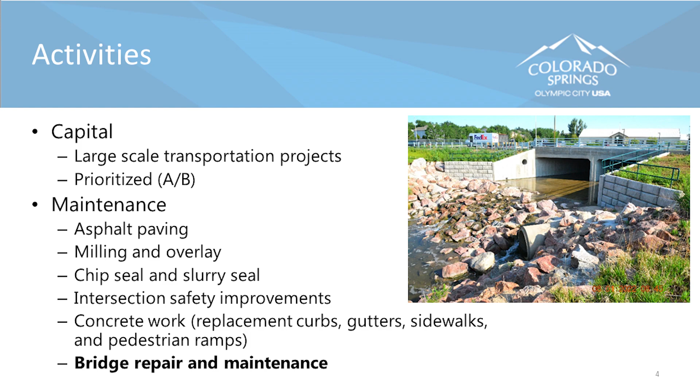So what goes into those components? I'm going to talk about capital at first, that 55%. We have both an A-list and a B-list prioritized list of projects, and those projects can be specific bridge replacement projects, and others can be larger transportation projects that include bridges. And then the maintenance or that 35% piece goes a lot to pavement preservation, intersection improvements, concrete work, walls we have within a right-of-way, and most importantly, bridge repair and maintenance.

Again, jumping into that 55% sales tax and how it applies to our bridges. First of all, that results in about $60 million for the city per year. Between 2015 and 2024, that resulted in about 17 replacements and 5 new bridges. And we're projected with our current extension between 2025 and 2034 to have 11 replacements and 10 new bridges. The other thing that's included in that capital component is what we refer to as an emergency bridge fund. And we're going to talk a little bit about that in just a moment.

That maintenance piece, or that 35%, between 2005 and 2021 has resulted in $511 million for the city. And again, as that gets applied to the pavement, concrete, or other structures in our bridges, we have a good application, and our bridge maintenance fund averages $8.5 million per year.

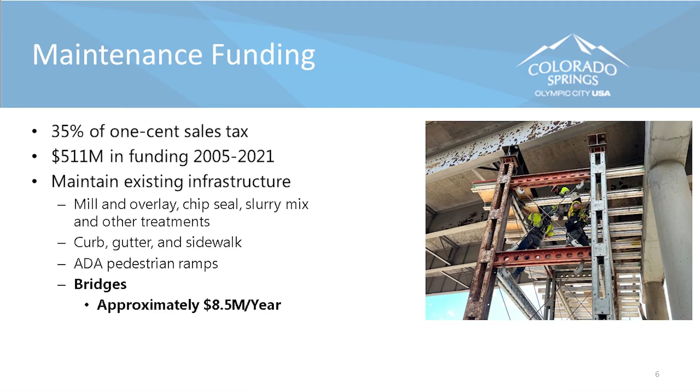All right, I'm now going to turn it over to Brian. He's going to talk more specifically about our bridge asset management program, and then we're going to come back and talk more specifically about the funding and how we leverage it. As mentioned earlier, I'm the bridge asset manager for the City of Colorado Springs. So I'll start with just a high-level overview of our bridge assets.

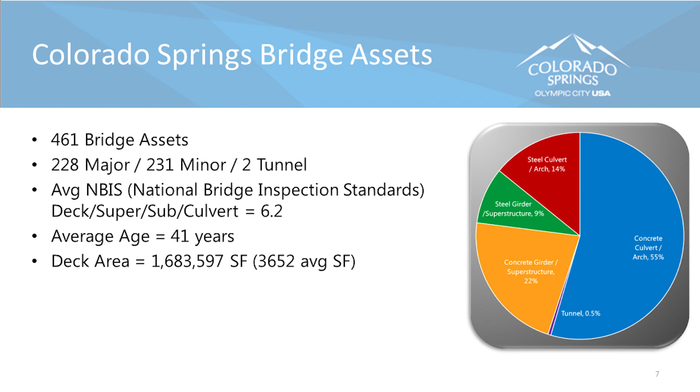We have 461 bridge assets split about evenly between major and minor structures, with 2 tunnels. Our average NBIS condition rating from the bridge inspection standards is just over a 6, and the average age of our infrastructure is approximately 41 years. I don't know if the graphic's legible or not, but about 70% of our inventory is culverts. The way the workflow functions for our bridge program is we receive the bridge NBIS inspection data from the off-system bridge inspection program.

In addition to the off-system program, we perform minor inspections on our structures that range between 4 and 20 feet in span. And we have an enhanced inspection program where we perform more frequent inspection intervals for our critically rated infrastructure, some of our infrastructure that's kind of in need of urgent maintenance and repair that we haven't been able to get to yet.

The program basically goes through the data that we receive, and we start identifying our capital funding needs. We break down our capital funding needs into 5-year bands, which feeds into the 10-year list of projects that Gayle mentioned earlier that ultimately go on the ballot for capital replacement.

Additionally, we perform hydraulic evaluations as part of this program to understand if we need to replace a structure, not necessarily due to its structural condition, but potentially due to its hydraulic adequacy. And we perform replacement analysis and studies of the bridges that we're planning to replace in the capital program, just to have a better, accurate estimate of what our funding needs will be.

Finally, we place a large emphasis on our preventative maintenance. A lot of our infrastructure doesn't have a waterproofing system in place, so we're going through and adding a lot of that with sealers and waterproof projects, and we're addressing a lot of our corrugated metal pipes with pipelining projects.

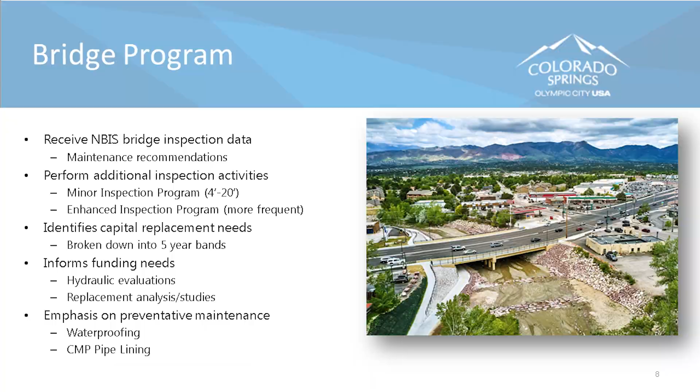Our main prioritization tool for the city is our City Health Index. It's modeled after the FHWA Health Index and is tailored towards the city's needs. It's comprised of 5 categories. We have a condition index, which is largely based on the NBIS condition ratings for deck, super, sub, and culvert. We have a function index, which is largely geometry based with vertical clearances and approach geometry.

We have a safety index, which is risk-based issues such as hydraulic capacity and traffic safety. We have a remaining life index, which is remaining life expectancy based on condition ratings and the controlling components, and an assessment ratio, which focuses on our pedestrian needs and missing sidewalks in the city.

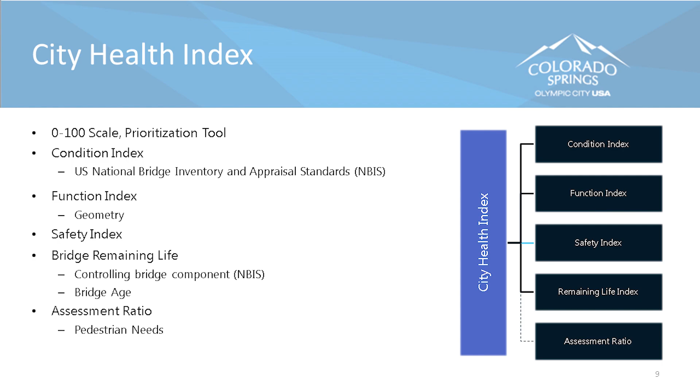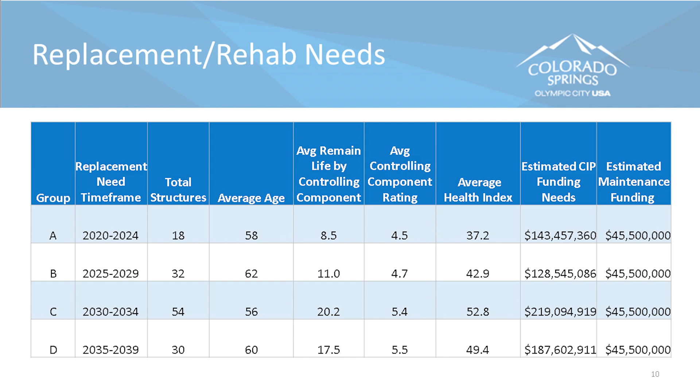The bridge program at the city has really come a long way in the last 20 years. About 20 years ago, before PPRTA was put in place, the maintenance funding for the city was approximately $250K a year. In 2004, 2005, when PPRTA was implemented, it jumped to $1.8 million per year, and it has steadily increased ever since. From 2015 to 2023, we've averaged about 4 rehabs or replacements on the capital side per year.

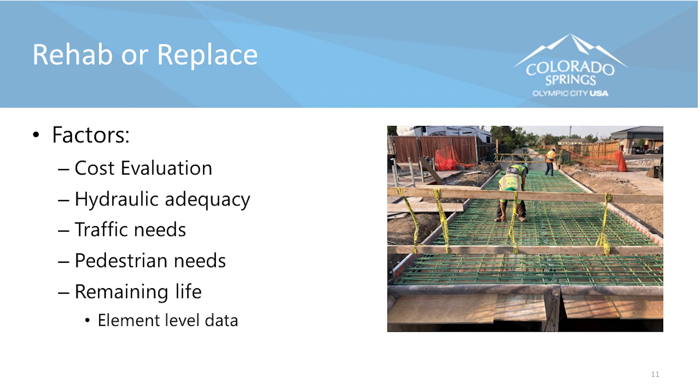The risks of our program currently are risks that everyone's facing. Cost escalation. Construction costs have ballooned over the last few years. Additionally, we rely on sales tax-based funding, so it's highly variable. We don't necessarily know exactly how much we're going to get each year. If there's an economic recession, we're impacted by that pretty heavily. Changing regulations, such as greenhouse gas emissions, stormwater, et cetera. Environmental concerns, railroads. We have a lot of railroad bridges that cross our inventory that impact our roadways that we need to address, and delays, which, railroads and delays kind of go hand in hand.

Some of the challenges of our program currently is our replacement needs are outpacing our capital funding, even with this program in place. 69 of our structures are beyond their expected service life. And as I mentioned earlier, a large portion of our inventory lacks a waterproof system. So we're addressing them with as many projects as we can.

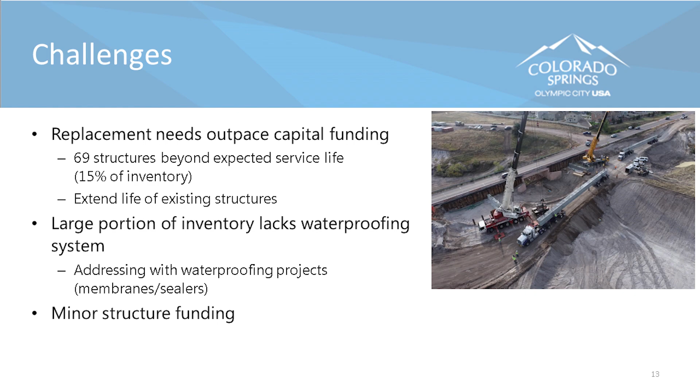On top of that minor structure funding, there's no federal minor structure inspection program, and that's over 200 structures on our inventory that we have to inspect, maintain, and replace over time. So as mentioned earlier, a lot of our structures are culverts. We have 43 corrugated metal pipes with an average age of 43. So many of them are beyond their expected service life. So we're methodically going through all of these structures to determine what the best scenario is.

Basically, the approach we're taking to these corrugated metal pipes is, are they hydraulically adequate? If they are hydraulically adequate, we consider rehabbing them with the project that we're implementing most commonly now, a cured-in-place pipe, effectively using the corrugated metal pipe as a formwork for a cast-in-place replacement. We're anticipating that we should get 50-plus years out of those replacements and effectively a new structure for a minimal cost. We don't need to dig a trench. We don't need to do destructive work. We can kind of just cast it in place.

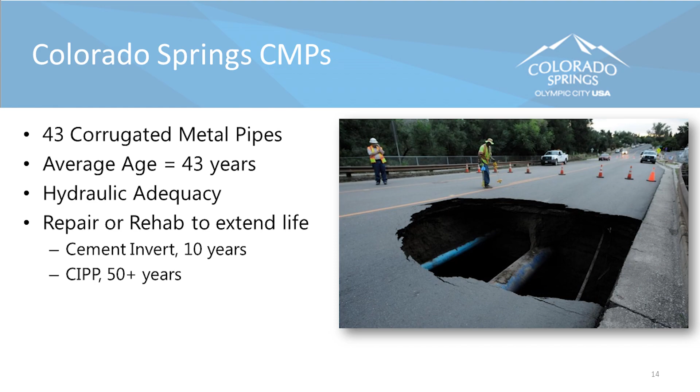Now I'm going to hand it back over to Gayle so she can talk about some of the funding strategies that we're implementing. Thank you, Brian. So as I mentioned previously, with that PPRTA funding being our primary source, it's really broken down to three main ways that we address bridges. So the first two are on capital, where it's either a named project specifically just for bridge replacement or a larger transportation project that has bridges.

We use that emergency bridge fund, which is also a capital component of our funding, for unforeseen issues that are arising, and we also use it to leverage for local grant match requirements. Right now, our average budget is $1 million per year, but we have been carrying a management reserve that we had built up, so we have between $1 and $5 million really to be able to address emergencies as they occur.

And then on the maintenance side, the bridge maintenance, Brian methodically looks at that bridge component of that $8.5 million and how he can extend the life through programmed and preventive maintenance, looking at repairs that are going to come up on a case-by-case basis, and doing that engineering work to help us make some informed decisions on applying funds in the future. Let me back up because I want you to take a look at this photo.

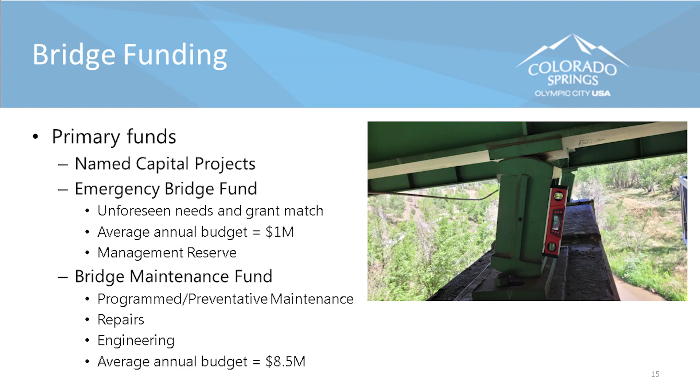This is a rocker bearing. Hopefully no one else has the same rocker bearing, but this rocker bearing that I'm showing you now is beyond the critical angle. This is on our Fillmore Bridge, and the reason why I wanted you to be able to see this is because we were able to use our condition assessment and this particular issue in our bridge to be successful in our application for one of the initial bridge investment program grants, one of 17 that came out within the country, and that's going to be addressing this condition.

Our grant starts off under that program for $750,000 in federal funding to do the planning and environmental linkage for that, and then we really have laid out a program, even in our grant application, how we plan on proceeding with that project and plan to apply for future funding under the bridge program. Again, we leverage that emergency bridge fund for the local match.

We were successful also in 2022 on getting an off-system bridge grant that is managed through the Colorado Municipal League to replace the Water Street Bridge over Camp Creek, and that award is for $1.3 million. And then we've also been successful in capturing a CRISI grant. If you're not familiar with that, that's a Consolidated Rail Infrastructure and Safety Improvements Program administered by the Federal Railroad Administration to replace two railroad bridges that go over Nevada and Tejon Avenue just in the south downtown of Colorado Springs.

We did get a $2.5 million grant, and that's going to be for the NEPA work and preliminary engineering. And again, that program we really set up to demonstrate how we plan on capturing funds in the future, both from a federal plan and progression and readiness, but also with our local match demonstration in the future.

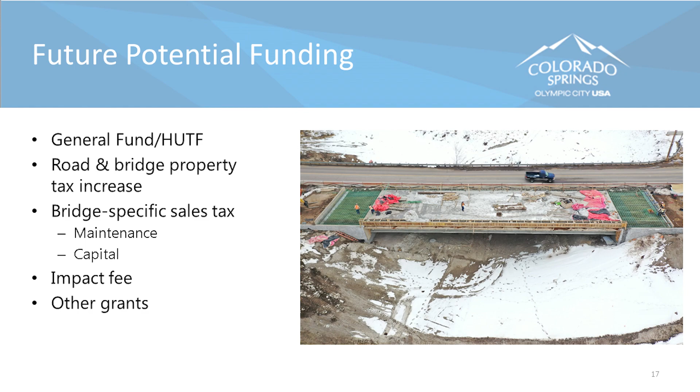We've also been considering and investigating impact fees, which would happen upon new development. This approach is really not very popular within our county, but it's still a tool in the toolbox. We want to be able to demonstrate that something should be thought about. And then we are going to continue to be extremely aggressive pursuing grants, leveraging the funds we have, and seeing where we can capture other grant opportunities within our community.

So I want to thank you for your time today. Brian and I hope you've enjoyed hearing about our local funding source and how we leverage it for our bridge program and how we really prioritize that spend through the bridge asset management.